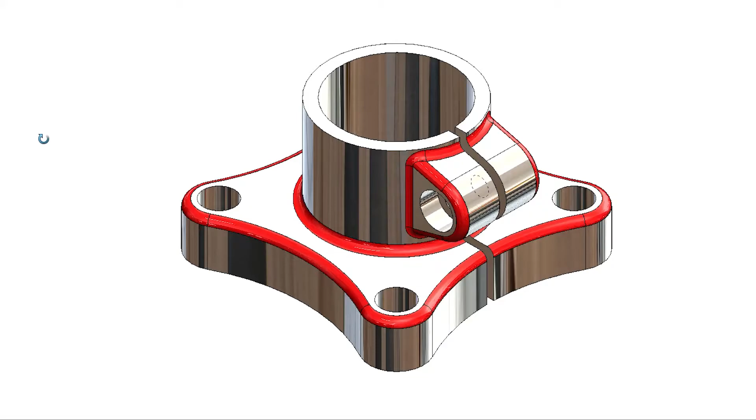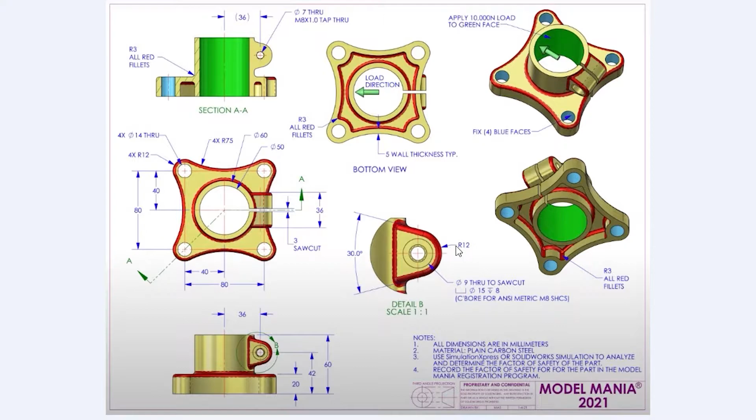Today we are going to make this simple part. This is 80 millimeter from center to center, both sides, 60 millimeter outside diameter, and 50 millimeter for this extrusion, this boss here. I will start with this piece first, and then this area. This piece has a height of 20 millimeter, 42 millimeter is the center, total is 60 millimeter, 30 degree is the angle, and 12 millimeter radius of this piece.

Let's start. I will open a new file, and on the top plane,

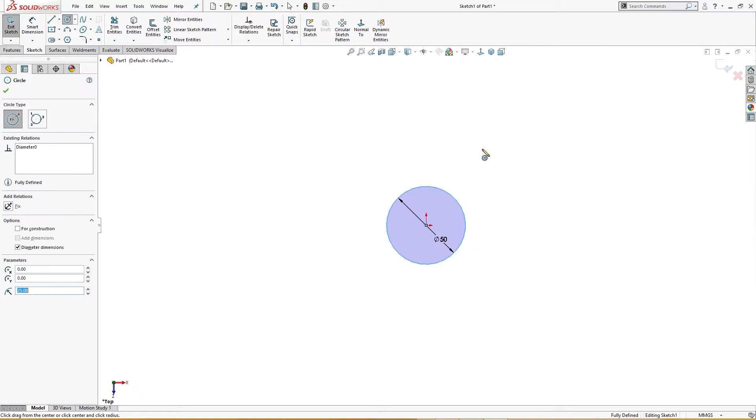I will draw a circle here of 50 millimeter and another circle of 60 millimeter here. I will draw a circle of 14 millimeter and another, remember, 12 millimeter radius, so 24 millimeter diameter, like so. I will draw a rectangle

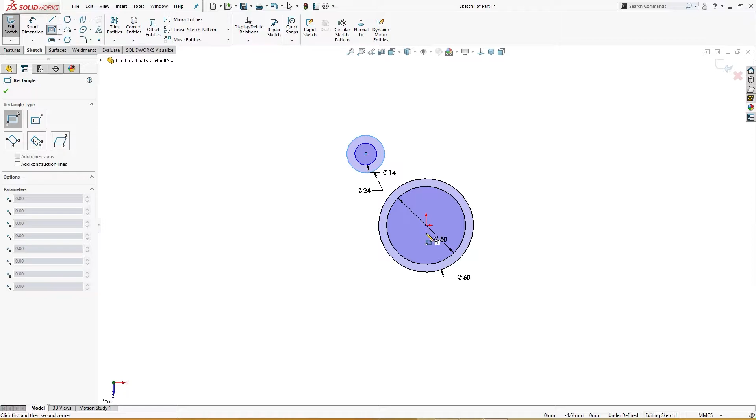from here to there. I will make it equal and give it a dimension of 40 millimeter. I will make it construction.

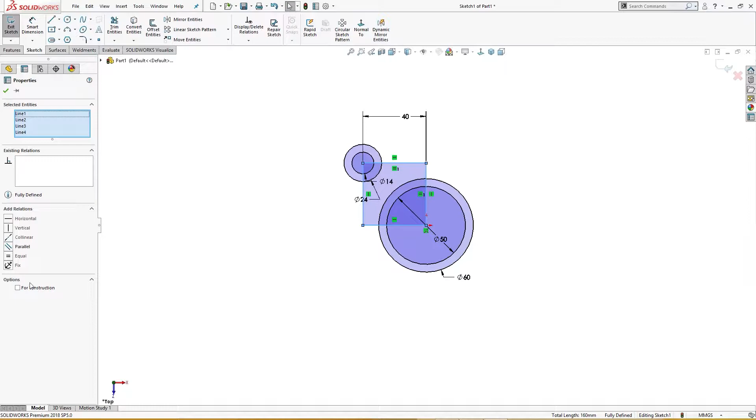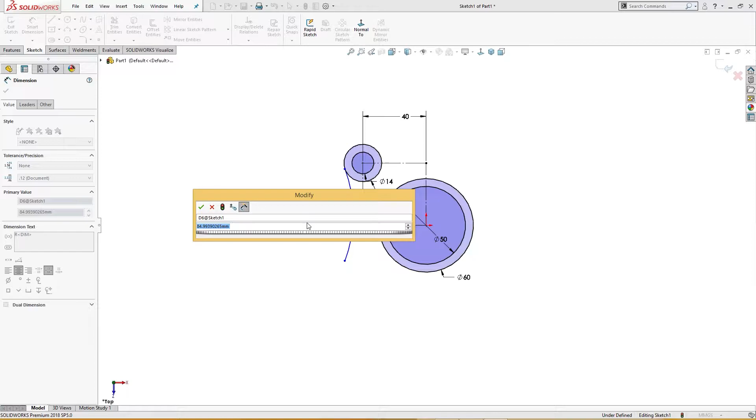I will draw a 3-point arc here, and I will give it a dimension of 75 millimeter.

Now I will pattern it, circular pattern, 4 times.

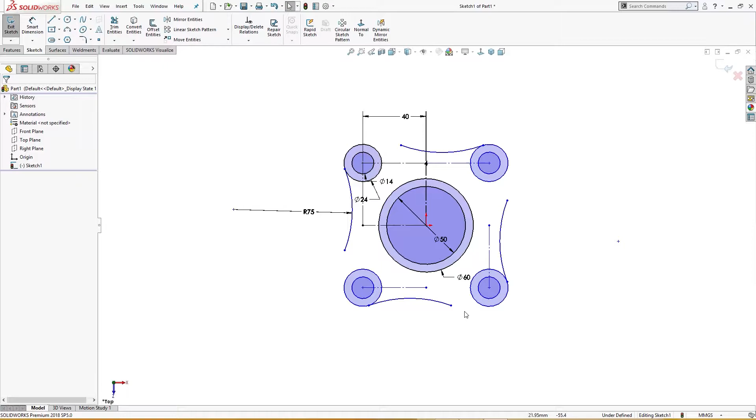I will join this to this here and make sure that this one and this one are tangent, and this one and this one are tangent, normal to. This is 14 millimeter radius here, diameter here, and it's 24 millimeter diameter here.

This and this should be in this, and this line should be tangent, and this should be vertical. I'll give it a dimension here, from here to there is 40 millimeter. Sketch is fully defined.

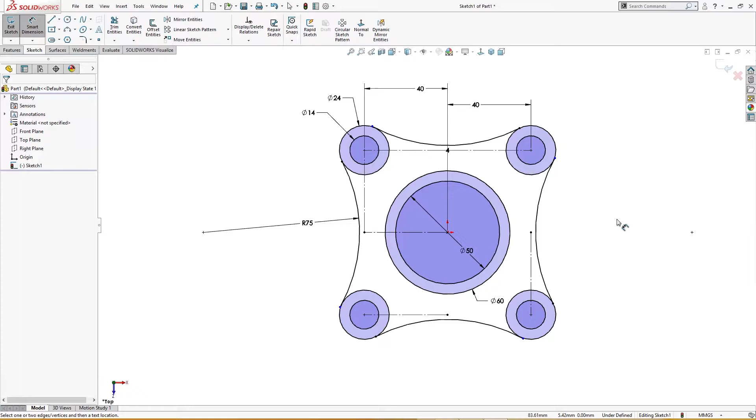So let's extrude it, 20 up to 20 millimeter. Selected contours, I will take this, I will take everything.

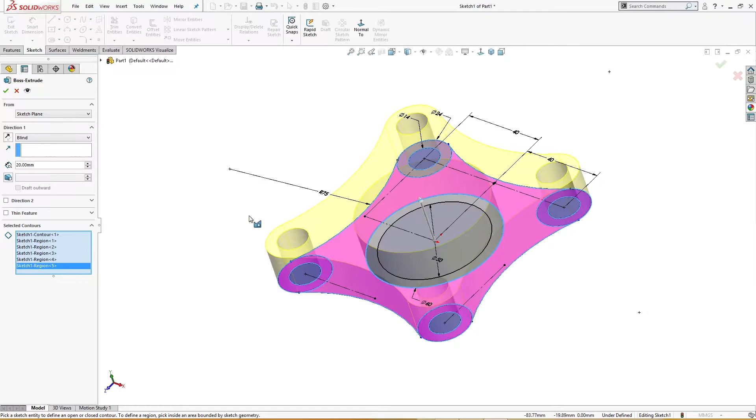Now I will shell this face 5 millimeter.

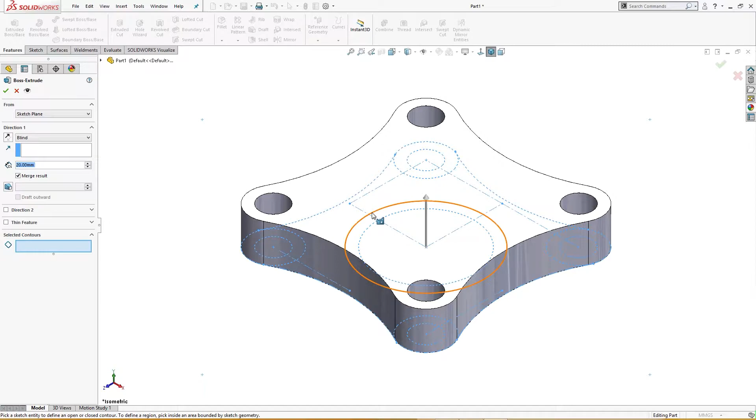I will use this sketch and extrude it, this face up to 60 millimeter.

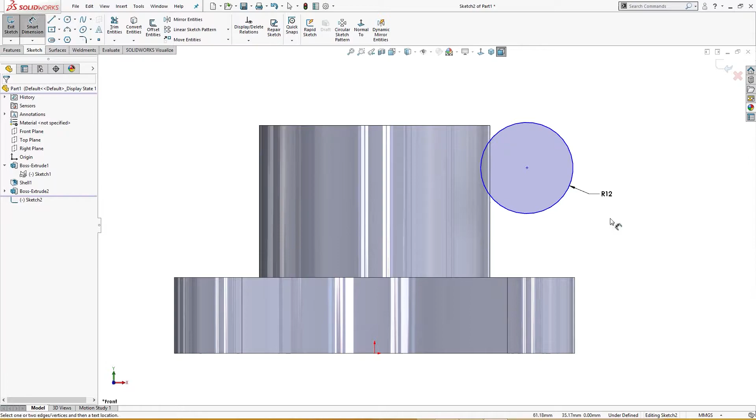On the front plane, I will draw a circle here of 24 millimeter because the radius is 12 millimeter. I will give it a dimension from here to this, 42 millimeter,

and I will draw a few construction lines from here to here, and let me draw a center line. So I will mirror it, like so. I will draw a line from here to close the geometry. Let me give it a dimension of 30 degree.

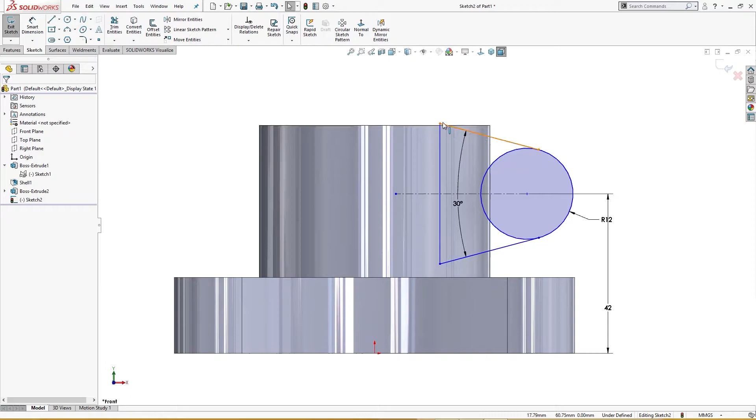I will join this and this here, and give it a dimension from here, 36 millimeter. Sketch is fully defined. Let me extrude it.

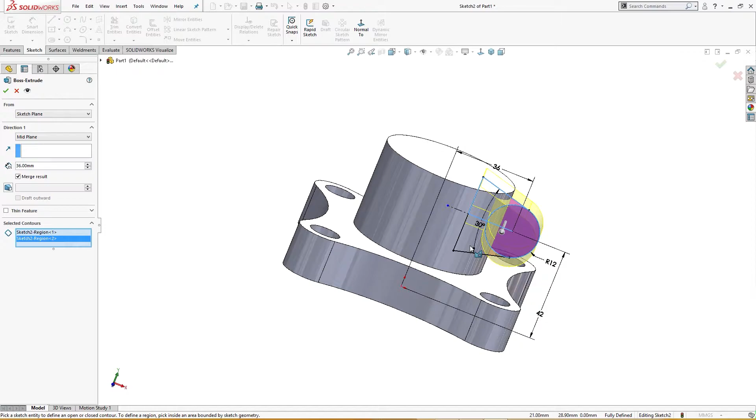Let me take a mid plane and 36 millimeter. Okay, I will select this.

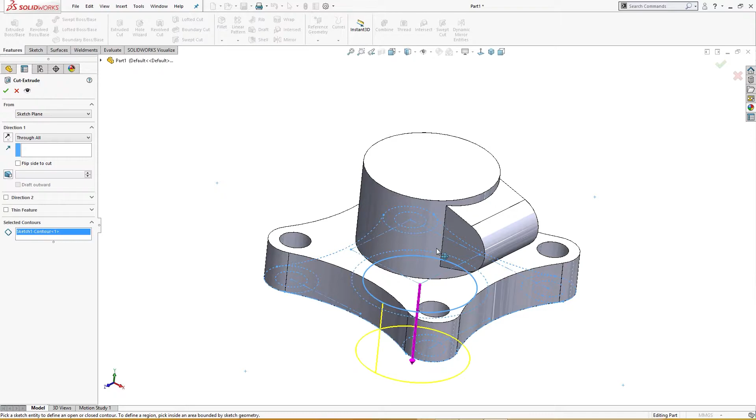Now I will select this and cut extrude. I will take only this through all.

Now I will draw a line here from origin to here somewhere. It's not important, it's arbitrary, and let me cut it.

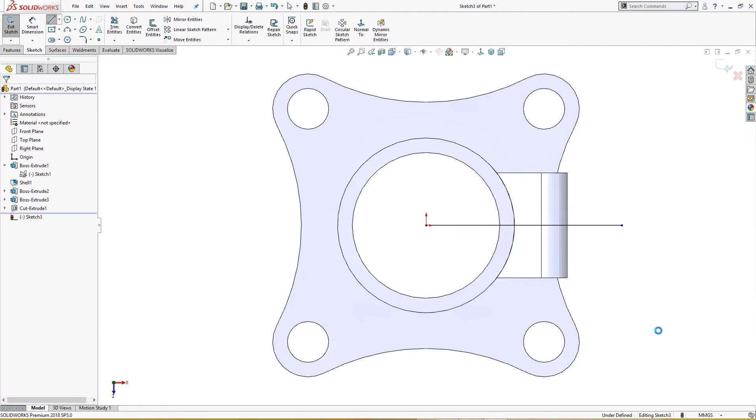Let me cut thin feature, 3 millimeter, mid plane and through all. So it will cut the part.

I will go for hole wizard. There is a hole here shown somewhere. This is the hole, 9 millimeter up to socket, and 15 millimeter diameter here, 8 millimeter deep. Counter bore M8, socket head cap screw. So let me do it.

I will go for hole wizard, I will take this socket head cap screw, metric socket head cap screw, show custom sizes. 15 is okay, everything is okay. On the position, I will take this and drop it here,

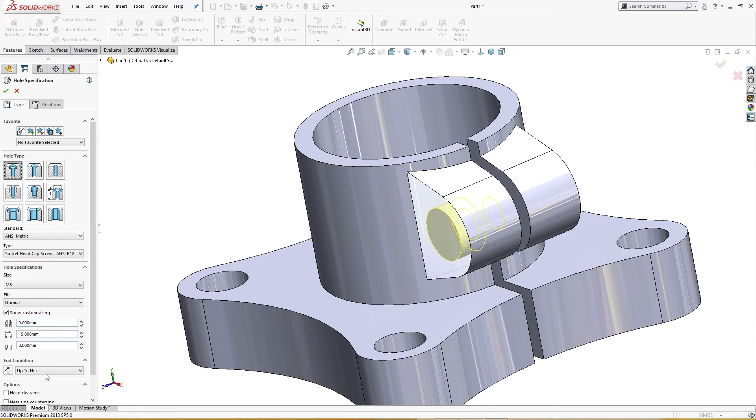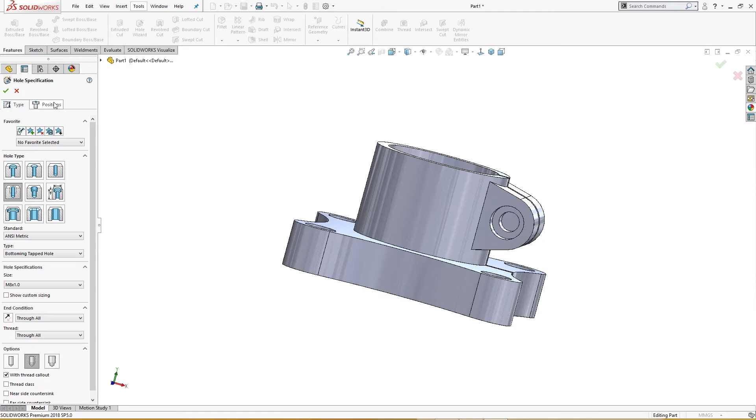and type is not through all, up to next, like so. This is okay, this is done. I will go again here and choose this M8 one, tapped hole, ANSI Metric, through all. I will position it on this face, like so. Okay, this is done.

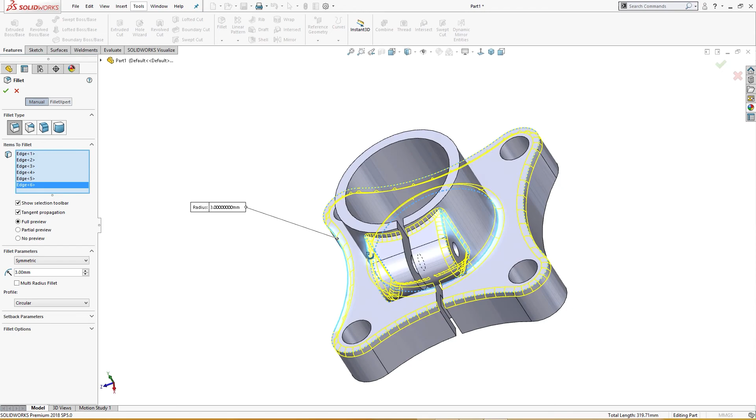Now is the time for fillets. Everything is okay. I will press the S key and take fillet. I will take this 3 millimeter, and this, and this. This is the top side.

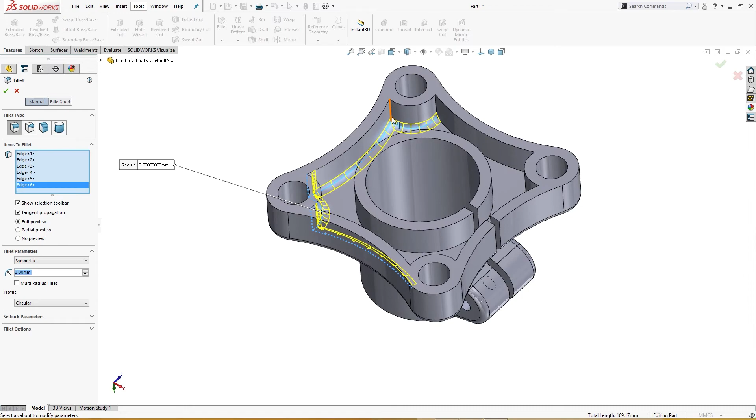Okay, now I will fillet the bottom side. Fillet. There are too many fillets here. Please bear with me.

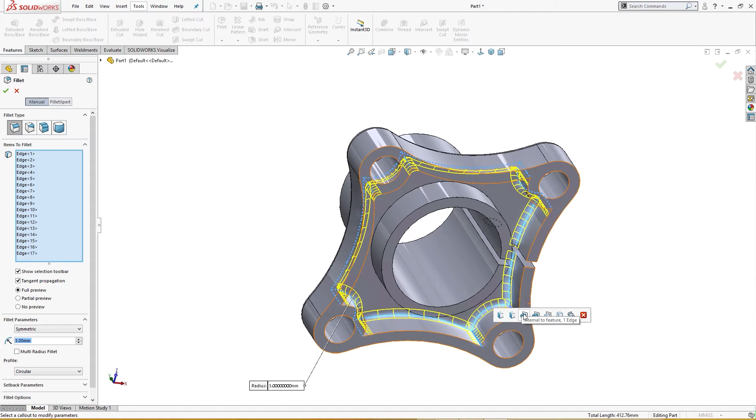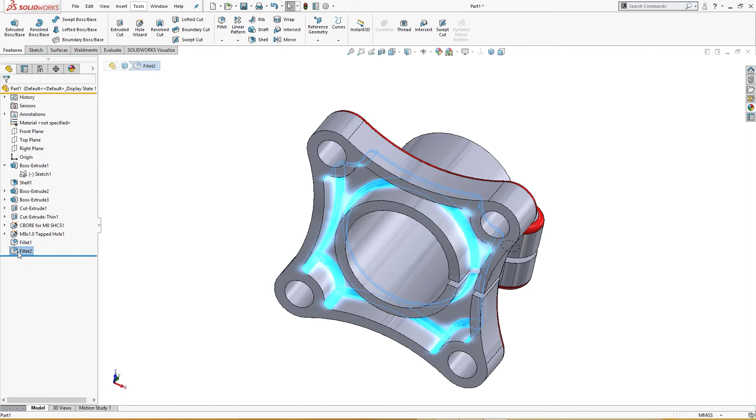Like so, and here is the fillet also. Okay, I will give these fillets a color to distinguish, and this fillet also I will give it the color.

The material shown here is plain carbon steel. I will give it plain carbon steel here.